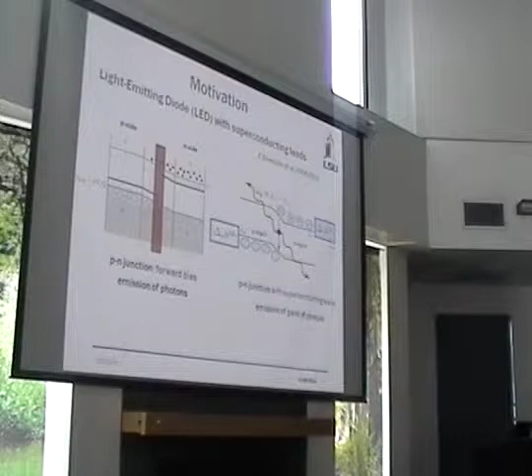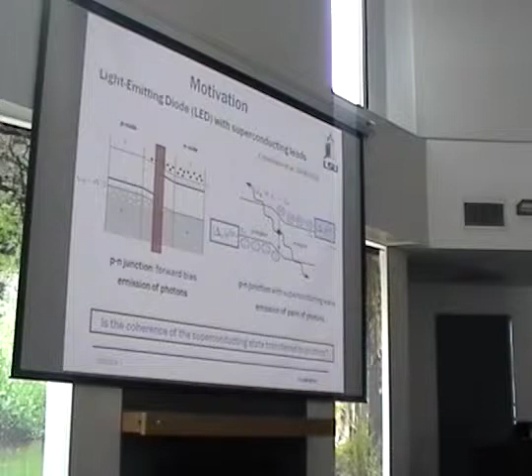So what we asked ourselves is what happens if I now proximity induce superconductivity in the leads. Imagine I have a pn-junction with superconducting leads. Because I now have Cooper pairs, I can produce pairs of photons. And the question that is important for quantum optics is, can I transfer the coherence of the superconducting state to photons somehow? So that would be a theoretical motivation. In fact, there would be no motivation if there wasn't an experiment.

There are actually a series of experiments by Suemune et al. This is the actual structure they use. There are niobium electrodes on top here. So this is not quite the system we're talking about, because superconductivity is induced only on the n side. And then there are two different layers here, but that's mostly to enable the tunneling of the Cooper pairs on forward bias into the depletion region from the niobium electrodes. And then there are normal holes coming from the other side.

And if you try to operate this device, first you try to operate it somewhere where niobium electrodes are non-superconducting, and you see that essentially what happens is there is emission at the energy which corresponds to the energy of this gap. So this is my equation. Of course, the intensity here depends on the current you drive through the system. So the current here is 1 milliampere. And of course, if you reduce the current, you'll see almost nothing.

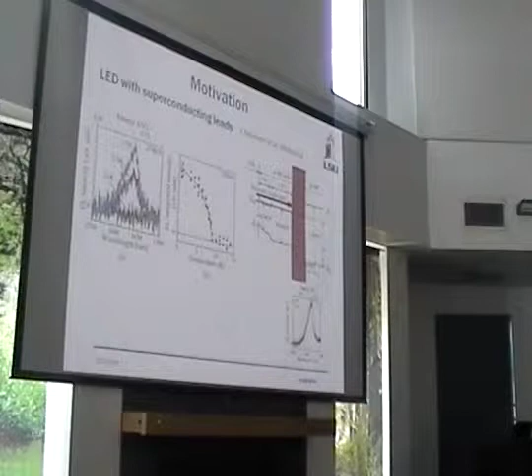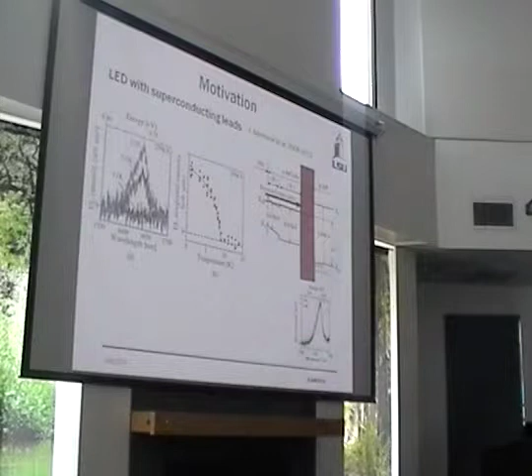And that remains almost true once you go below the superconducting transition of the niobium electrodes. And here are the results. So this is the current that is 1/4 of what it used to be. And you see that above the transition temperature, you basically see nothing. But if you look at the intensity of the luminescence, you see that it's growing as you go below the transition temperature. And in fact, it grows as the superconducting current grows. So this is not a crazy question to ask: what effect might superconductivity have?

Yes? What is the degeneracy temperature of the leads, and is the temperature below or above it? The degeneracy temperature, if you just estimate it from the density. It's nowhere near. I mean, this is 10 Kelvin, right? Well above or well below? So basically, if you look at this picture, you can answer the doping question. So the Fermi energy is basically already in the band here. So this is actually fairly high density.

So it's fairly high effective Fermi temperature. So I can think of it as a degenerate electron or hole gas. So it's actually electron gas, yes. Oh, so it's a classical gas? No, it's not. It's a degenerate gas. Yeah, so the Fermi temperature is very high compared to the temperature. And that's what you can see basically here. So anyway, that was the motivation.

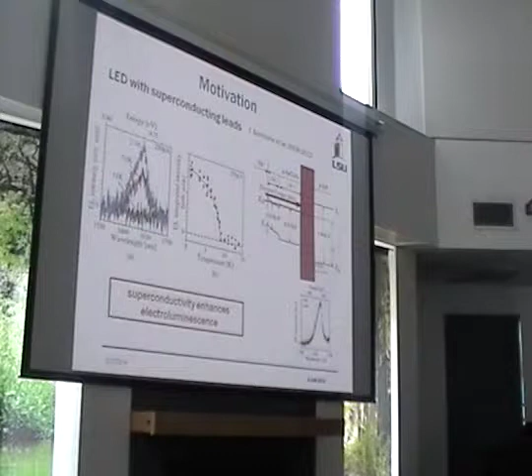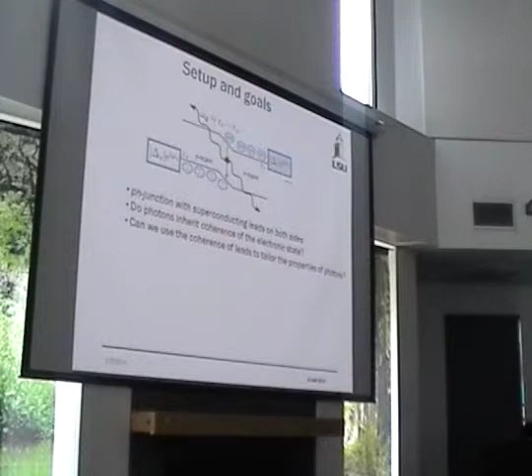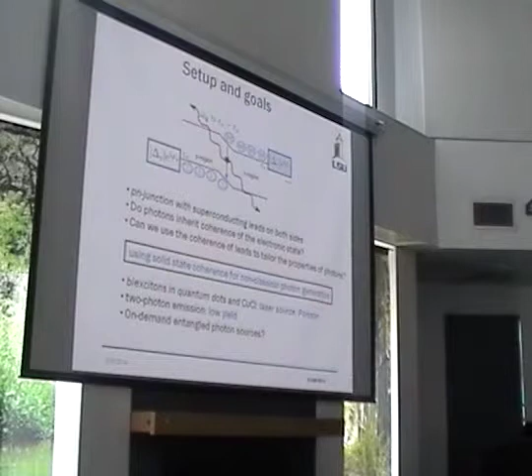So now from this it follows that superconductivity at least does something to luminescence. And now we can set up a problem. So I asked already whether photons carry some coherence of the electron state. And generally, as I learned in the process of working on this, it's a question of whether you can use solid state devices to have non-classical photon generation. And apparently there are some examples where this can be done, and I know of two. One is biexcitons in quantum dots, and the other is two-photon emission from a nonlinear optics crystal, and they give fairly low yield, and in the first case they still give sort of a Poisson distribution. So that's the motivation.

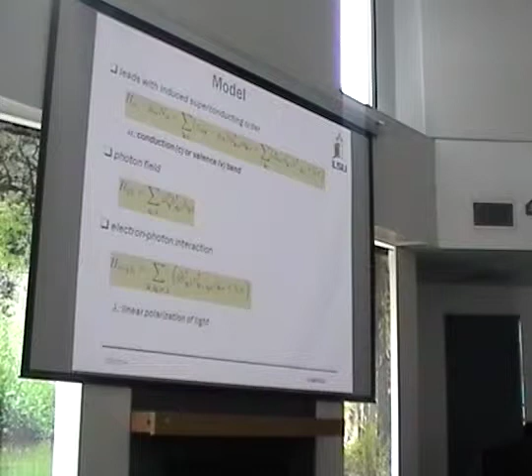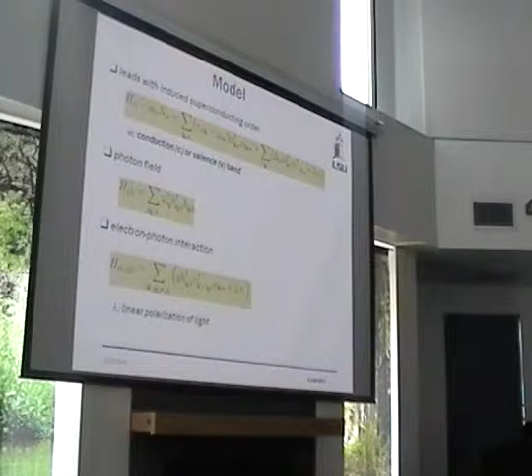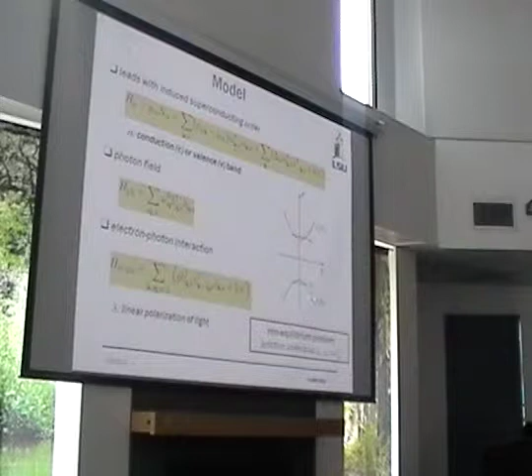Now let's set up the problem. I'm a theorist, so I need to write a Hamiltonian. So here is the model. And the model consists basically of the two leads. So here, the alpha stands for the conduction or valence band. So there is a dispersion, there is an induced superconductivity, and there is a photon field, and there is a coupling, which tells me that if I kill a conduction electron and create a valence electron, there will be a photon emitted in the process. Now, what makes this a little bit more complicated is that this is a non-equilibrium problem. Namely, because I'm using the junction under bias, the chemical potential is different in the conduction band and the valence band. In fact, the difference between the two is precisely the bias we apply to the junction.

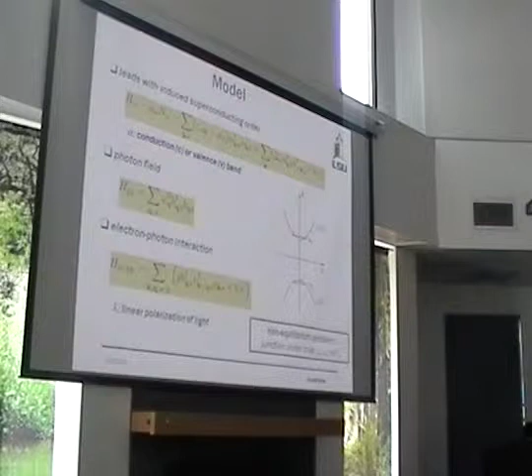Can you say what's V? So V or C are the valence or conduction band electrons. In the bottom equation? In any equation. So I move an electron from the conduction band to the valence band, and I emit a photon in the process. So the superconducting pairs are always within the valence band or the conduction band, right? There's no mechanism for pairing between a conduction band and a valence band? No, because this is basically an electron volt difference in energy, while the TC is 10 Kelvin. So it depends on the band gap of the semiconductor. Right, so the band gap is large enough to prohibit interband pairing. Yes.

So, all right, with that, now one needs to decide how to treat this problem. The first inkling that something interesting is happening comes if you just write equations of motion for the photon operators, so you write an effective Hamiltonian for photons that to second order in coupling reproduces exactly the same equations of motion. Because it's a non-equilibrium system, there aren't all that many choices that we can use.

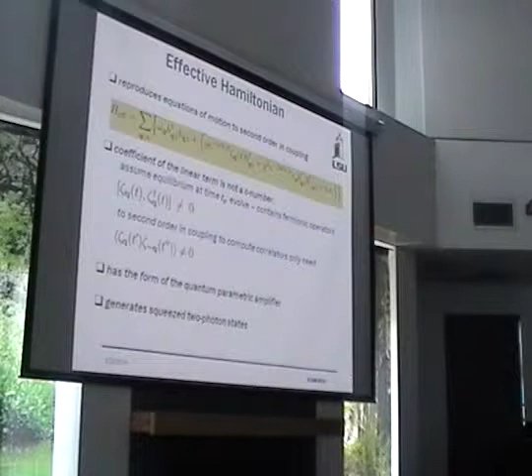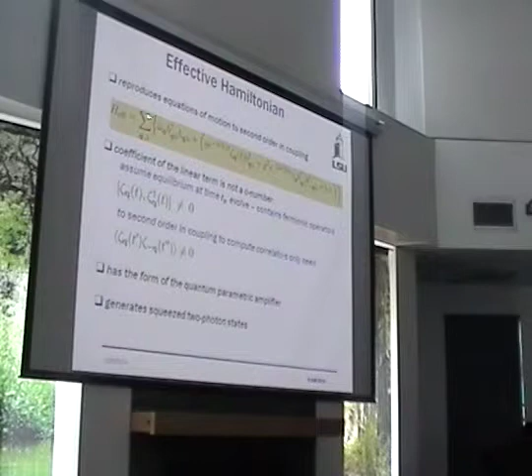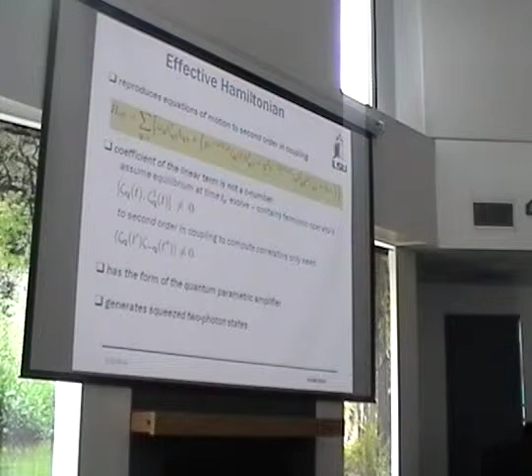So now this is the answer, and it has basically a couple of terms. This is my original term. Notice that the frequency changed from something I call omega 0 to something called omega, which means that there is a correction to the frequency due to this. And then there is a single photon emission, and there is a double photon emission. Essentially, this is the term that arises due to superconductivity, and this is the term that in principle is responsible for the conventional luminescence.

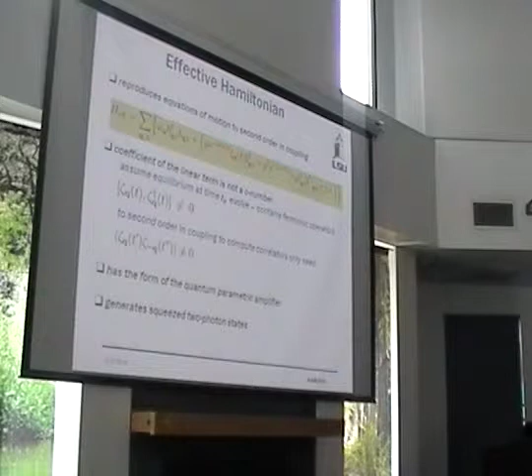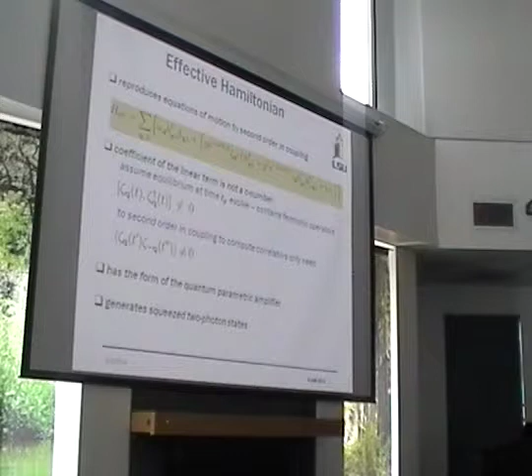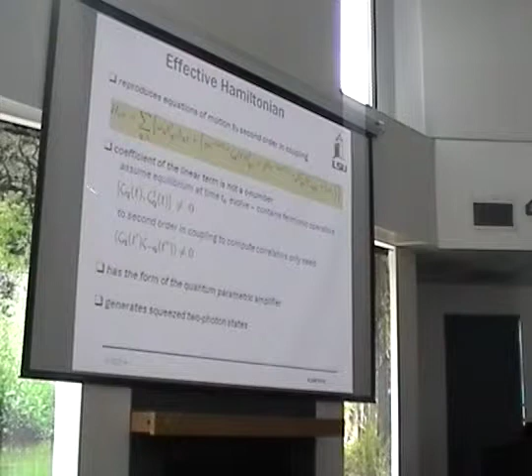There is, however, again a caveat. Because this is a non-equilibrium problem, when I evaluate this coefficient, I need to integrate some fermionic equations of motion from some time long in the past when things were in equilibrium. So these actually contain fermionic operators, and because of that, they can't be treated as usual C numbers. For example, the coefficient and its own Hermitian conjugate don't commute.

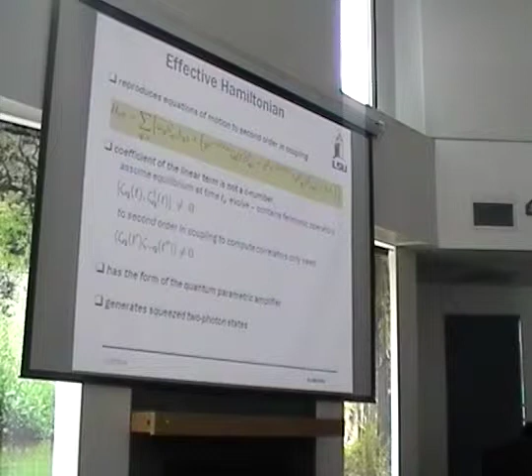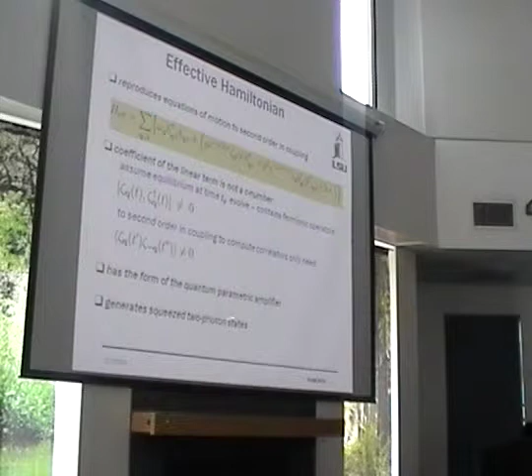So what one can do is to say, well, I'm going to look at it as sort of the terms in a Langevin equation, where to second order all I need is to evaluate the correlators of these things, and I know how to do it in any thermodynamic situation, and these will be not equal to 0. In that case, we can look at the old literature on quantum optics and know the answer. This is called a quantum parametric amplifier, and this thing generates squeezed two-photon states.

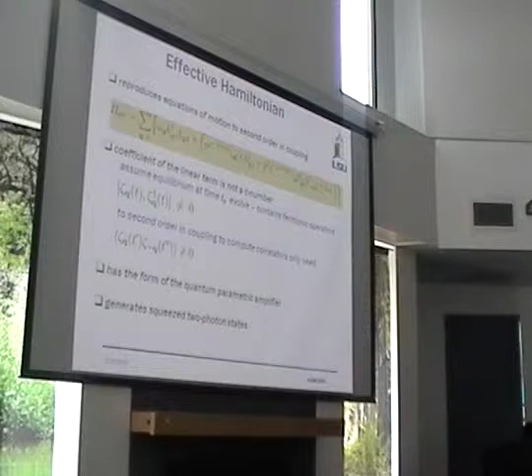So now I need to explain what exactly I mean by this. What are the squeezed states? Imagine that I have a photon field, so I have an electric field. I can quantize it, so it has annihilation and creation operators. And I can introduce what in case of an oscillator would be the position and momentum operators, and here it would be more or less amplitude and phase operators. And they don't commute with each other.

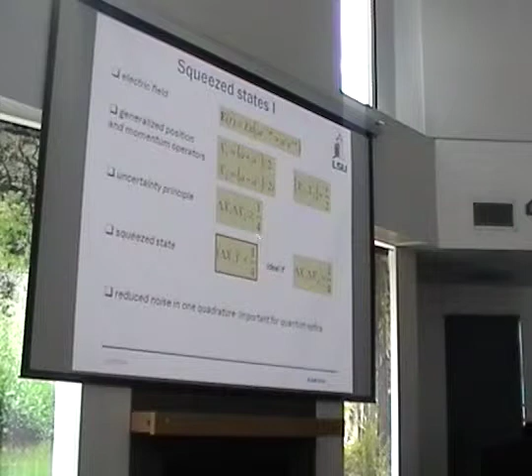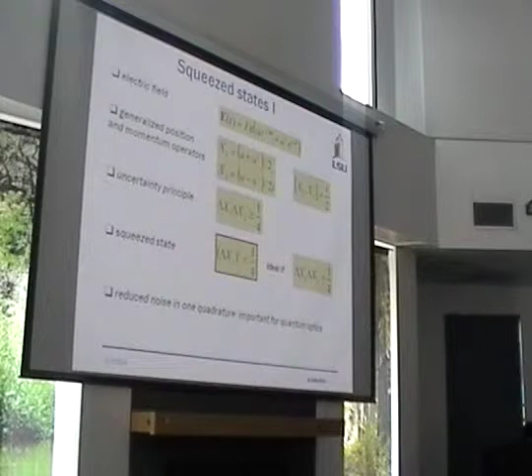Because they don't commute, if I look at the uncertainty measuring one and the other, there will be a Heisenberg principle, which in this case tells me that the product of uncertainties has to be greater than 1/4. Generally you would expect the two to be of the same order, but a squeezed state is one where I reduce one of them below this threshold at the expense of the other. It's called an ideal squeezed state if the actual minimum uncertainty is satisfied. These states are important for quantum optics, and what they look like is the following.

And if I had simply the C numbers for my Hamiltonian, I would say, well, this is the Hamiltonian that actually produces the squeezed states, because I look at it and I say, well, first of all, this is a single photon generation. It sort of reflects non-equilibrium, gives me the usual luminescence. It doesn't contribute to two-photon coherence, but the thing that actually gives me the squeezing ellipse is the second term, and this term has a phase, which tells me what the squeezing is, and it has some magnitude here. It depends on the coupling.

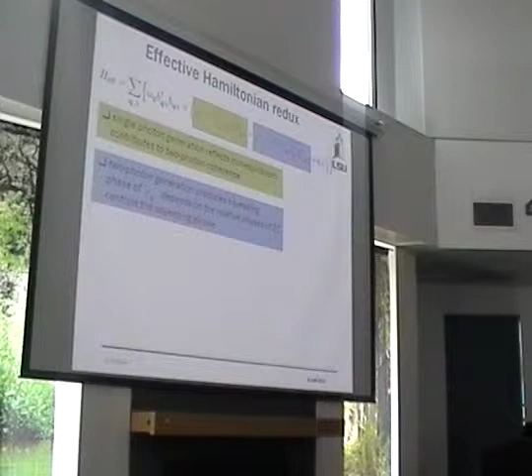However, and here I need to give a slight warning, that if you look at the second term, you see that these are two operators that generate photons not in the same state. In fact, one is in the state with momentum plus q, and the other is in the state with momentum minus q. So I need to define to you what the equivalent...

What happens to the polarization? Are they opposite polarizations too? Here. So in this case, there's supposed to be lambda there, and it was polarization. So this is all written for linearly polarized light. In principle, if I look for the system without inversion symmetry, I would need to worry about circular polarization, but I think it can be included in the same way. And at this point, they are the same polarization.

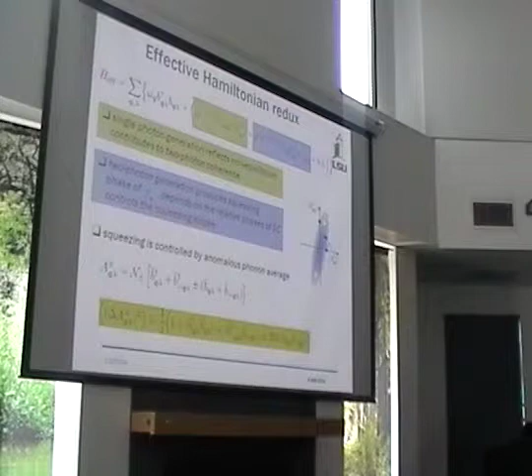So this is just a generalization of these operators I told you about for two different photons. And if you look at this quadrature, so plus and minus play the role of x1 and x2 in what I did before, you find that there is this anomalous photon correlator that tells me how squeezed or how elongated this ellipse is. So my task in some sense is to evaluate this object, and then I'll be able to tell you what the degree of squeezing is.

Now, to do this, we actually used the Keldysh formalism. So we wrote the effective action using essentially the Nambu version of the photon propagators, and evaluated the propagator to the second order in coupling. In addition to the electron, we introduced essentially a bath which tells you that the photons decay out of the system. That gives me some equilibrium distribution at long times. So if I look at it first of all at zero temperature, here is the answer.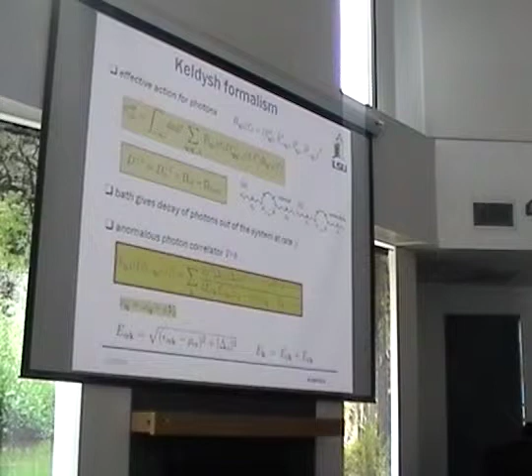And so you'll see two things at this point, that there is something here, and there is a phase that depends on the difference in phase between the superconducting order parameters in the conduction and the valence band. Which tells you that actually the direction of this ellipse, what exactly am I squeezing, the amplitude or the phase, depends on the phase difference between the two superconducting leads, and therefore can be manipulated. In addition to this, I would like to know the degree of this squeezing, so I need to look at the amplitude of this thing.

However, there is a second peak here, which corresponds to what happens when the photon energy is shifted from that by the gap in the conduction and valence band. And the process that describes it is actually very simple. What I've done is now I broke the Cooper pair, and then I decided to allow it to migrate. So this process gives me a peak at the lower frequency, which is shifted by the sum of the gaps in the conduction and valence band.

Now, of course, you look at this and you say, wait, there is a third process where I do the same thing, but only I do it from the valence to conduction band. The only difference is, of course, I need to spend energy to do this, so it doesn't happen at T equals 0. It has to happen at finite temperature. And so on the next slide, you'll see that we do the calculation.

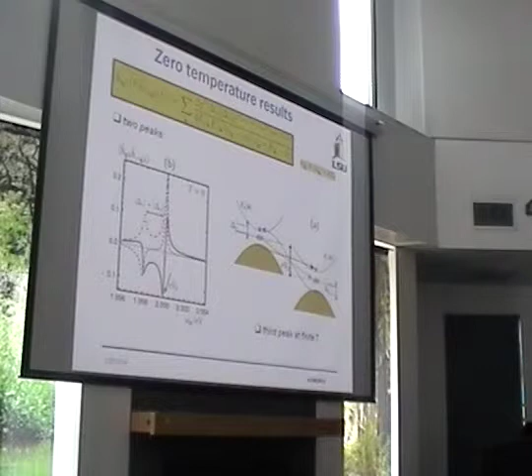Ilya, can I stop you and go back a slide to these interaction diagrams? The one before. Yeah. I should have stopped, there are a lot of circles here. Okay, this one. So it's to second order, right? Yes. Is there a justification for doing it up to second order?

Well, electron-photon coupling is relatively small compared to other parameters. So at this point, I don't expect any resonance to occur, which would be when I need to resum the whole thing. So I don't see it at this level. It is possible that at some point I'll start forming some polariton type things. But at this point, I don't see any evidence for this, so I don't see anything divergent.

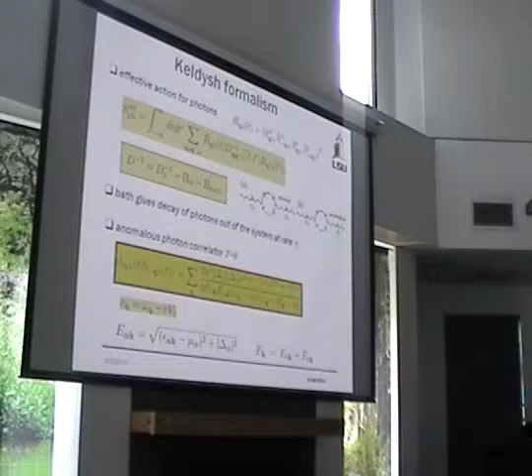And I think this is partly because we allow the photons to escape the system, so there is a bath. I think if you put it in a cavity where all the photons stay, you will probably get some resonant state. We just didn't get that. So, you'll have to suffer through the circles again.

And then essentially, if you do the calculation at a finite temperature, you'll see that there are 3 peaks. And these 3 peaks correspond precisely to moving the Cooper pairs, or saving energy by moving the Bogoliubov quasi-particles, which are in the band here, to the valence band, as well as the activated part that corresponds to moving the particles from the valence band to the conduction band.

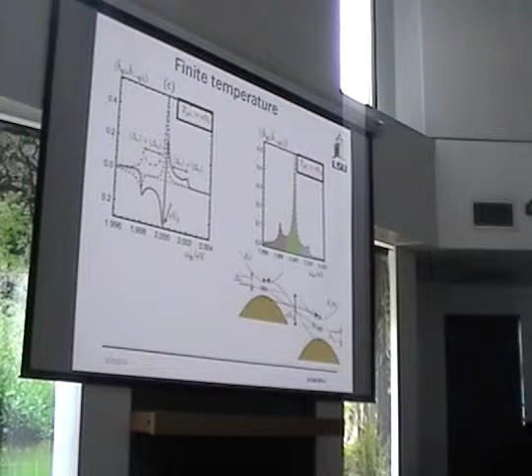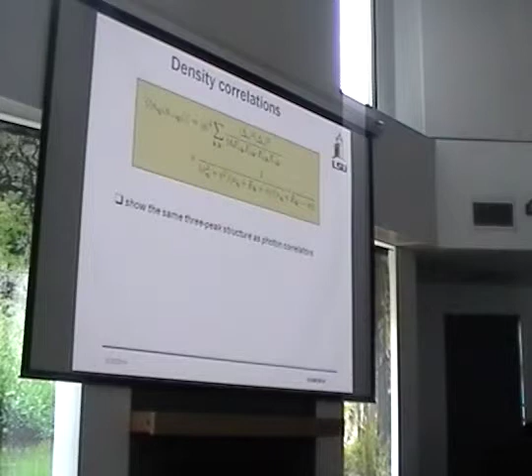Now, in contrast to single mode squeezing, you can actually find that the same type of peaks are present in the density-density correlation. I don't show the picture because they show the same 3-peak structure. And since I was told that I should obey Frauenfelder rules, I am coming to my conclusions.

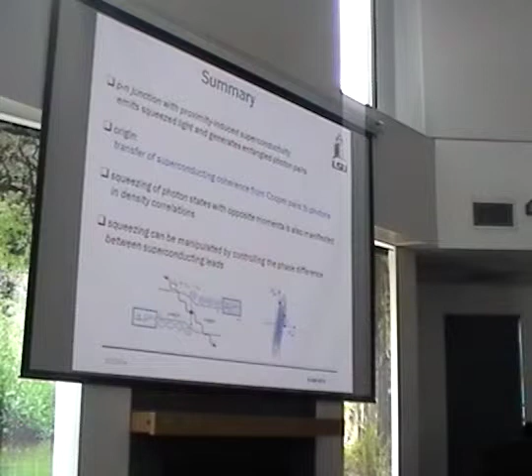What we considered is a pn-junction with proximity-induced superconductivity in the leads. I tried to convince you that this thing can generate entangled photon pairs, and the reason is that we can transfer the superconducting coherence to the photon production. In fact, the states are squeezed, and the degree of squeezing is controlled by the phase difference between the superconducting leads, and the peaks depend on the gaps, while the central peak depends only on the band gap. So with that, I thank you and am taking questions.

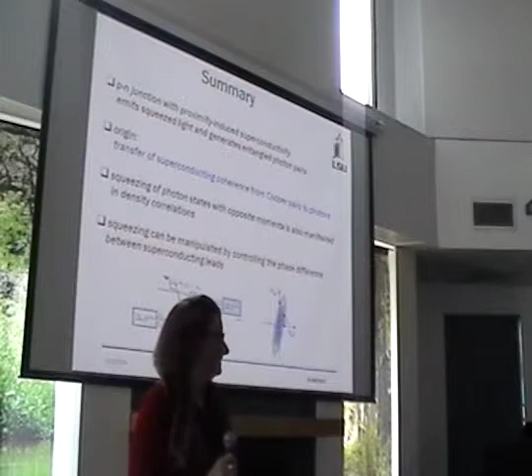Dan? So is there some proximity effect leakage of pairs into the semiconductor? Yes, that's the assumption. That's an old measurement, that goes to the 80s. Yeah, there have been a lot of measurements like this; I've done quite a few myself, where you can control the critical current by the gate voltage in such a system, without luminescence. So you definitely can pull that off? Yes. It's a long-range proximity effect, and especially in indium arsenide, it's like forever.

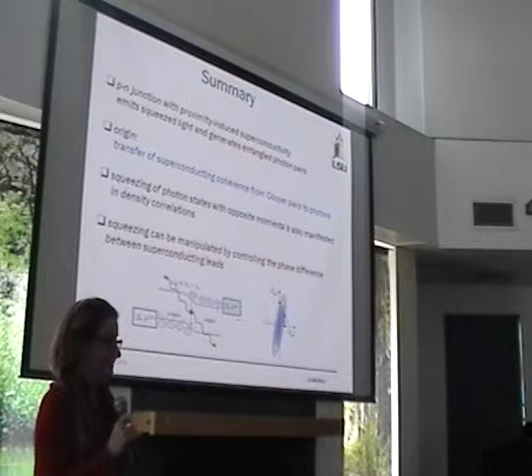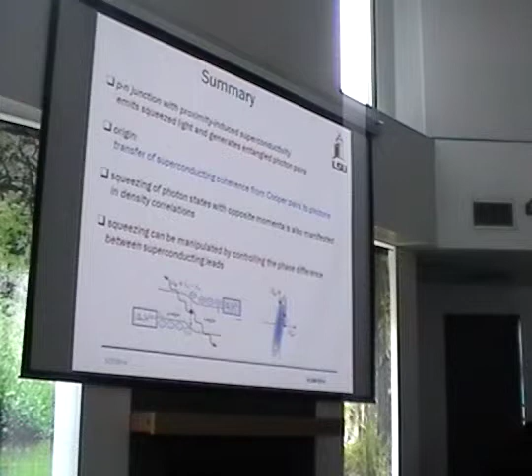This is probably science fiction, but is there any capability to Josephson couple two superconductors optically using this? So this is the next step, which we haven't done. If you imagine that I send these down an optical fiber and connect them up, get some equilibrium steady state for the photons, and try to compute the change in Josephson coupling because of this. Absolutely. The answer is there should be, but I haven't calculated it because I think it will be g to the fourth.

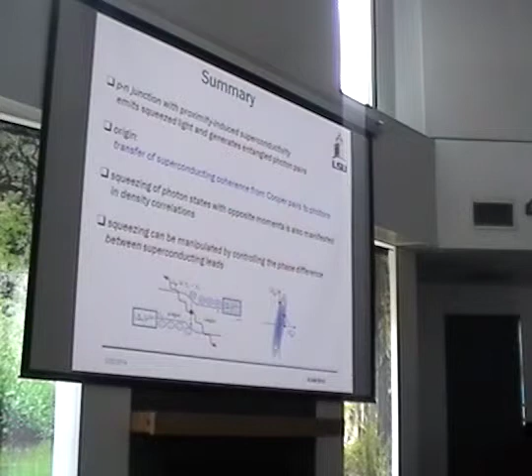But could I also use Peter Littlewood's favorite example, could I synchronize two superconductors by doing this? Could I get two slightly out of phase things and send photons across? That I'm not sure. Well, you can have photon-induced tunneling, right? Yes. There was a lot of work in the old days, was it a Josephson effect or photon-induced tunneling? And you can actually couple Josephson junctions. People do that all the time. So I'm sure it's been done.

I'm sure they've optically coupled Josephson junctions. That would be the one-photon phenomenon. Yeah, but the question is whether you can do the phase transfer. So you transfer two photons, and it's like transferring a Cooper pair from one to the other. So I think it's the fourth-order process, so g to the fourth. Oh, yeah. So one needs to do more. But even if it's weak, in principle, you could use it to synchronize your Cooper pair metronomes.

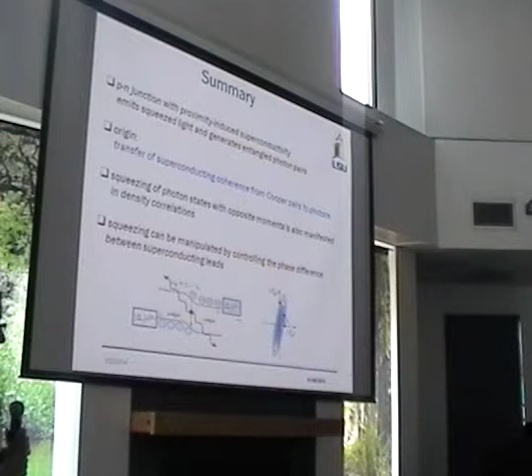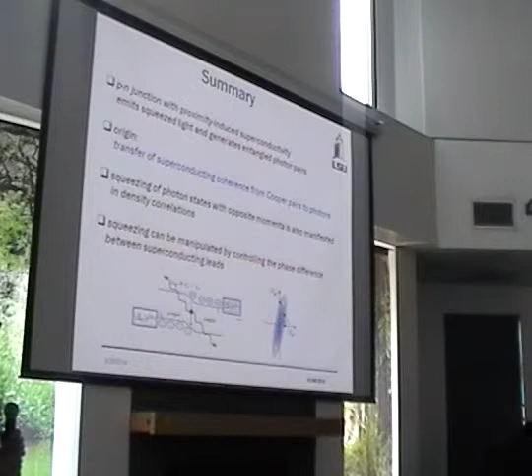Yeah. So Peter worked now without my participation. I did some calculations to order g to the fourth just to explain the luminescence itself, because at this point we focused on squeezing. I actually didn't tell you about what I started with, namely the luminescent signal, or rather the radiative recombination rate. There he finds some relatively weak signal, but he tells me, and again, this is something that I have not participated in, that there are some vertex corrections that he's worried about.

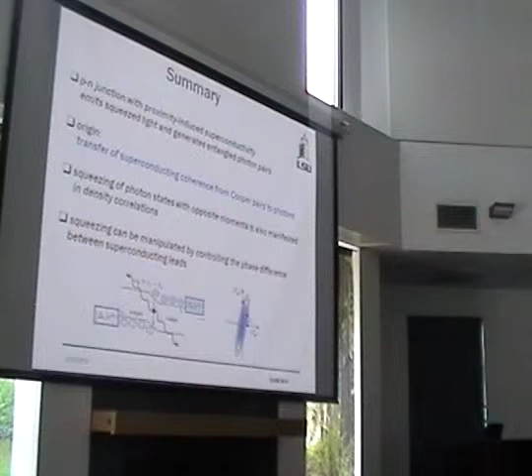Can I ask one question? When you go back to where all those circles were, and you have the Cooper pairs going from one material to another, you have your denominators which show peaks. Why would a Cooper pair going from one to another give you a density of states like that, give you a Green's function like that? Do you have a physical feel for that?

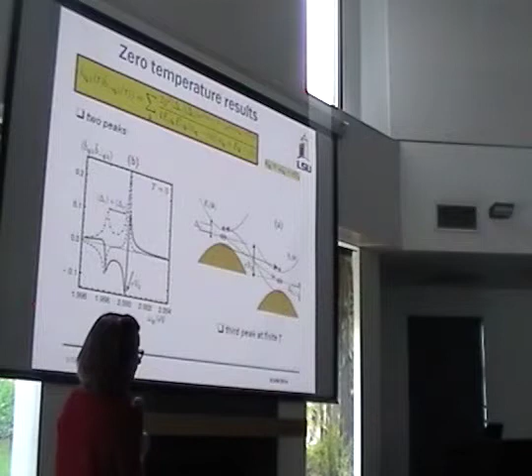Well, at this point, this is presumably just the peak in the density of states effect. I'm convolving. I don't have a feel for why that would happen for the Cooper pairs transferring from one to another. I don't see why that would give you any change like that. Well, because it's a macroscopically occupied state, right? This is a condensed state, so I have a huge number of Cooper pairs in that state. So why wouldn't that be at zero energy?

Oh, because basically this is the bias voltage between them, because the chemical potentials are different, right? The Cooper pairs are at the chemical potential in each of the leads, and there is a difference in chemical potential, so that's exactly where the peak is. I think I'm not used to thinking of the density of states that way. Okay, never mind. Go ahead, Conrad.

So I had another question, since you have this slide. You have these Cooper pairs which are migrating, and that gives you the two-photon peak. What about the other one where you break them up? Is that actually counterproductive in the sense of output? Well, at this order, again, the higher order might be different, but at this point I just break them and they both migrate, so they lose the phase information as they do that. So they recombine then again and give you a photon?

Well, right, because I have to break a pair, I have two of them to generate two photons, and they go without keeping the phase information. At this point, I haven't told you anything about whether they recombine or not, because that will be the next-order process where I'll see whether it contributes back to this peak. So to second order, I just need to say that they separated and jumped. That's all that I can do. To higher order, maintaining the phase. Yeah.